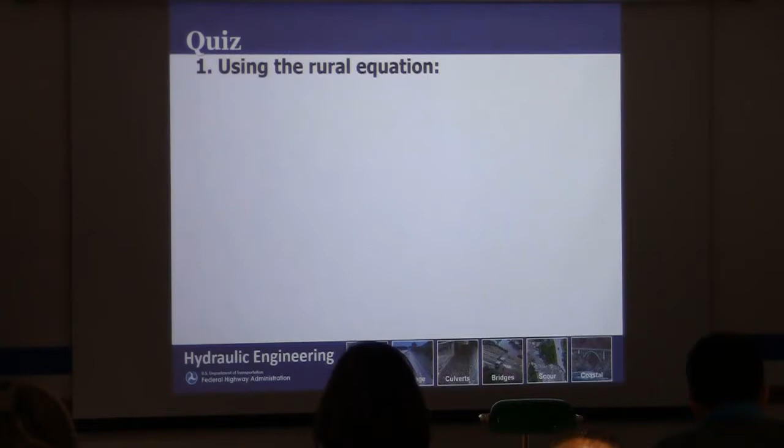Okay, why don't we go over the answers? So, using the rural equation, what does your Q25 equal? 1,800. Everybody get that, or about that?

Okay, great. How about the urban estimate? What did you get for the Q25 urban, with the BDF equals 0? 1740. Anybody else get anything? What'd you get? Okay, we got 1,700. It's probably just the calculator and the rounding off and stuff.

Okay, great. And so, oops, BDF of 4, I just gave it to you. What'd you get for a BDF of 4? So around 1,900, somewhere in there. And how about for a BDF of 8? 2,400. Well, isn't that funny? You got the BDF 8 right on, and you're a little high for the others.

Oh, well, yeah, but for Q25 you got 1,735. Anyway. Well, for the 1900 I got 1966. Yeah, I got 1967. But you came up with 2,400. Just odd. Close enough though.

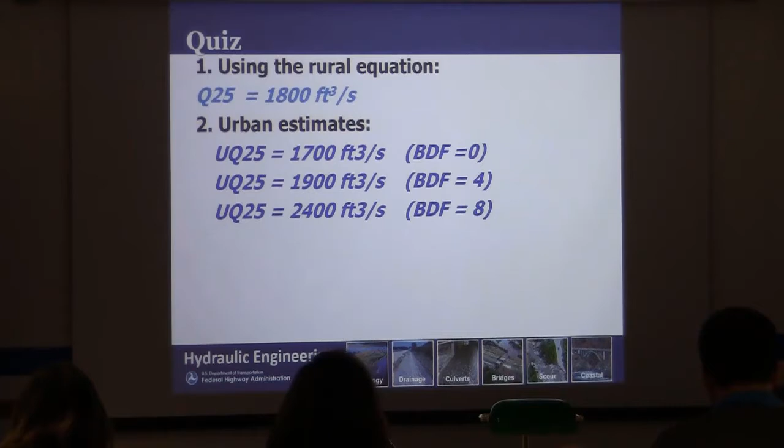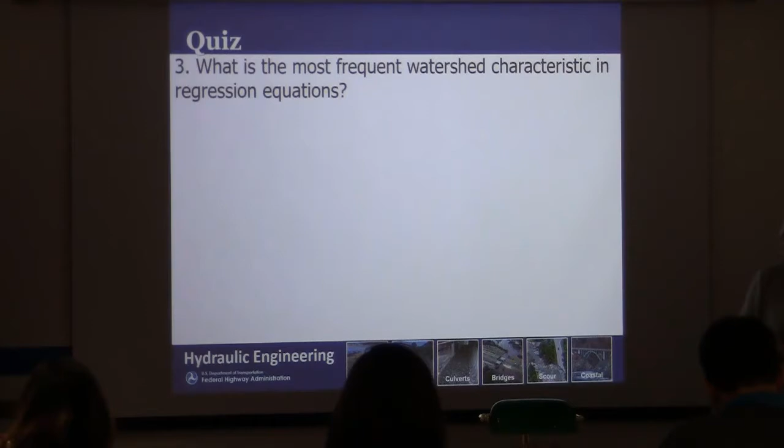Yeah, exactly. Okay. So question 3, what is the most frequent watershed characteristic in regression equations? Drainage area. Great. So, number 4, what's the standard error of the equation used in question 1? 41.3. And what does that suggest about the actual 25-year peak flow? There's an 84% chance it'll be 2,500 CFS or under. Yes, 84% chance.

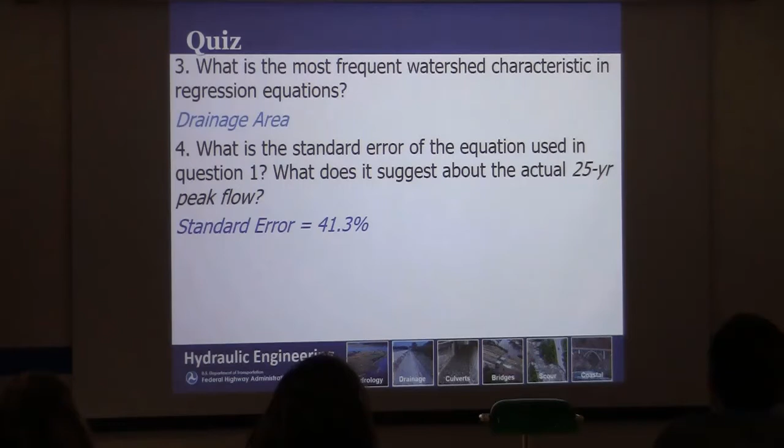But in more general terms, we're 68% sure that the actual value of the peak is within plus or minus 41.3% of the calculated value, and we are 84% sure the actual value of the peak is less than the calculated value plus 41.3%. So do you understand how we... that's funny, it's not showing.

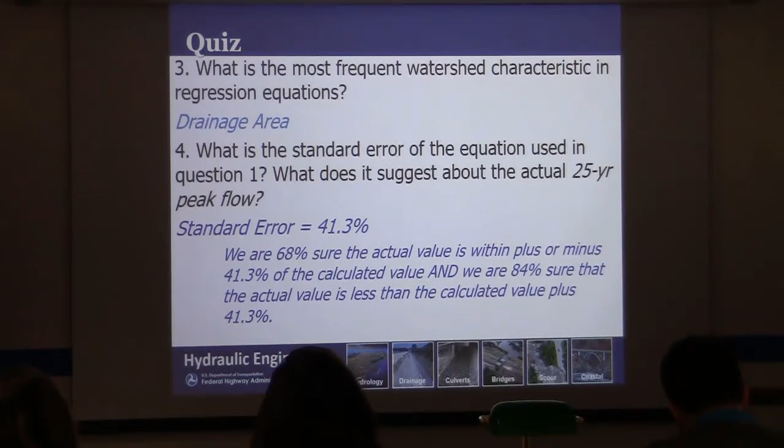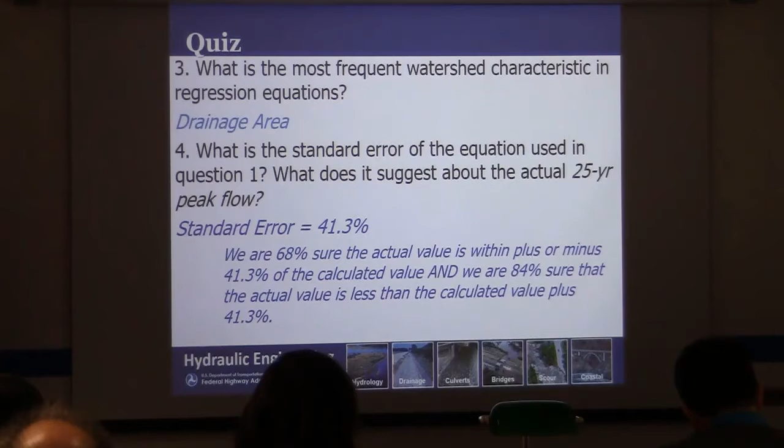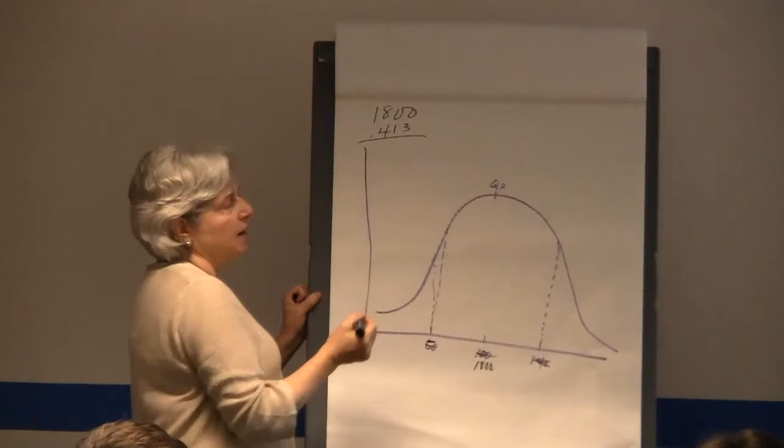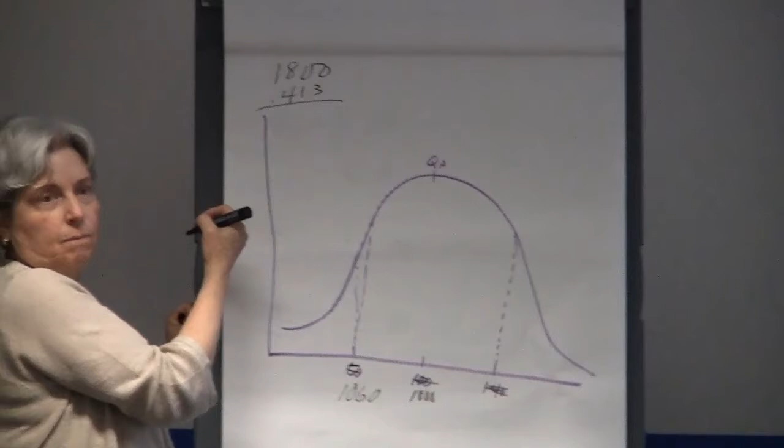So what we're actually saying is, if we calculate a peak of 1,800, minus 41.3%, we'd get the number. If you calculate this number, what do you get? About 1060. Yeah, what's the difference in these two? It must be, what, 740? Something like that. And this one is 2540, right?

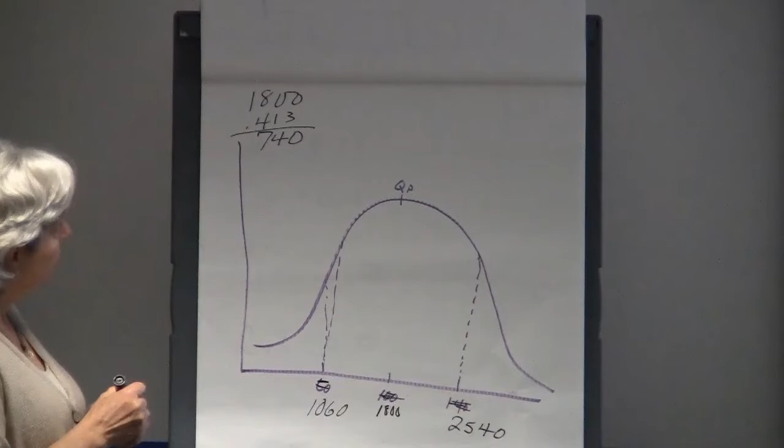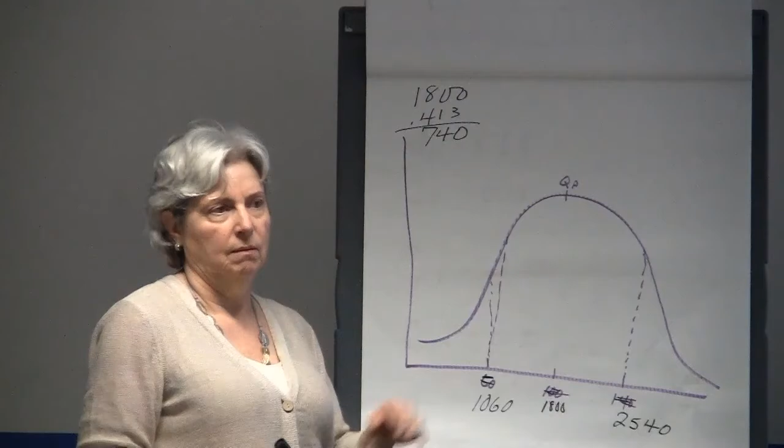So that's how you calculate your standard error and what the range is. Our 1,800 is our best calculation, but within one standard error the peak could actually be 2540, or it could be 1060, or anywhere in between. So we have a 68% chance that it's somewhere in this range, and an 84% chance that it is 2540 or less. Okay. And is that it?

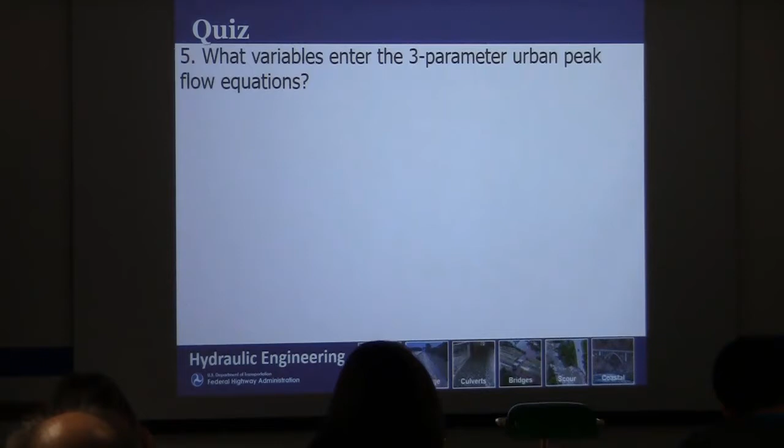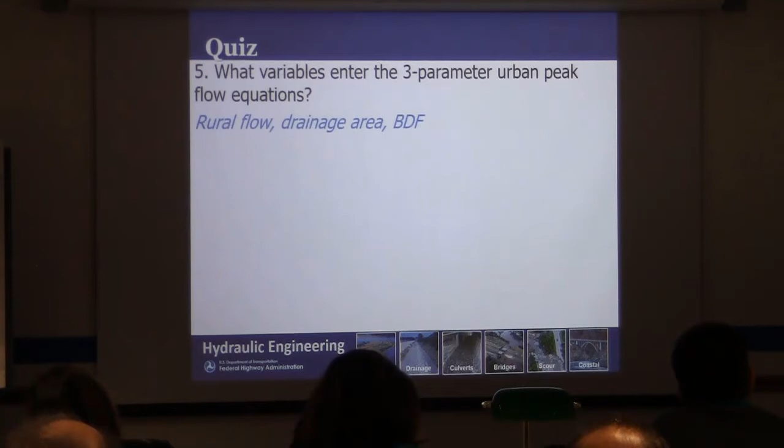So what variables enter the 3-parameter urban peak flow equation? Area, BDF. Rural flow, yeah. That's what you saw in the equation for the urban equation. Well, from the rural equation, depends on which equation you're using, but for this one, you're right.

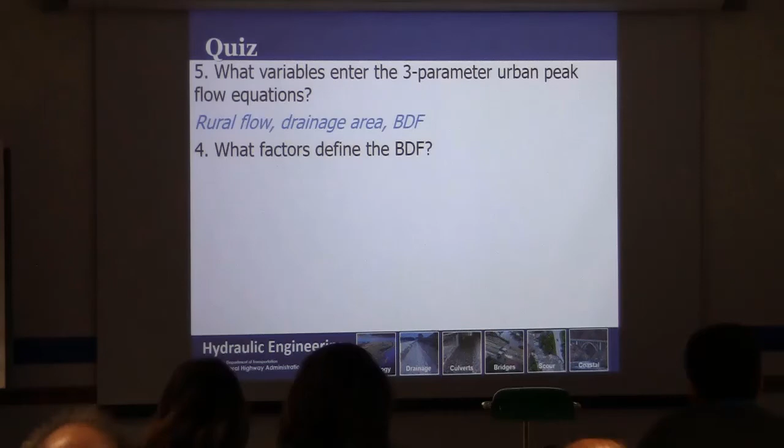Okay, what factors define the BDF? Channel modification, channel lining, storm drain coverage, urbanization, curb and gutter. Okay, everybody get that?

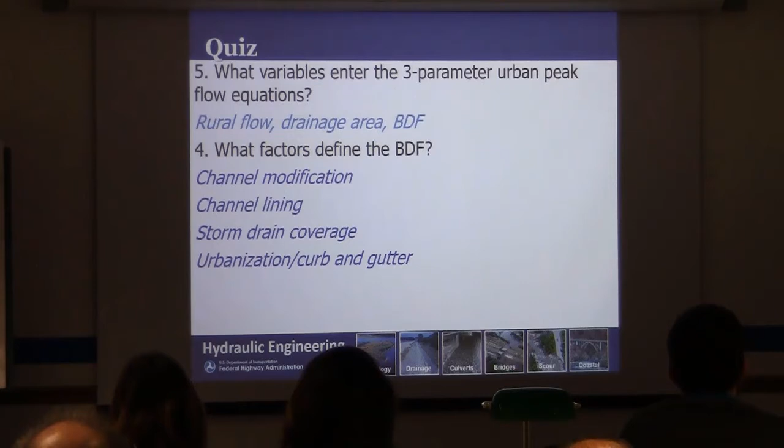Is BDF equal 0 indicative of a rural watershed? No, not always. So not necessarily. Why or why not? Because you can still have a 49% urban watershed, or just the way it's all laid out, you can have a bunch of urban land in the watershed, but still not over 50%. So it's still kind of rural.

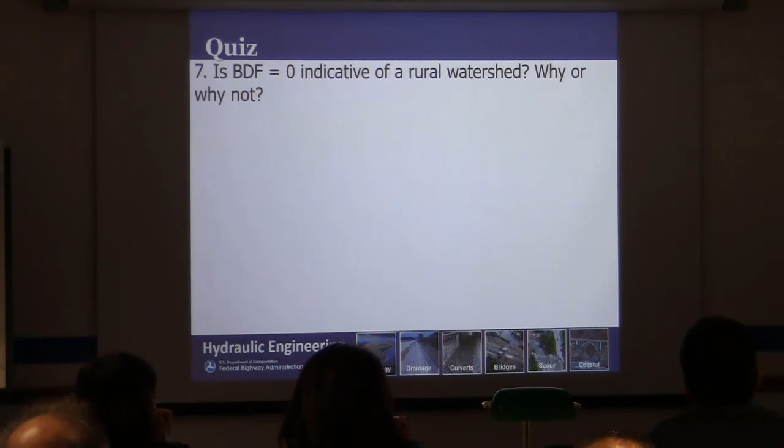Yeah, because it might be lightly urbanized and the BDF would be 0, but that's not always the case. Medium urbanized too, if it's up to 49%. Exactly. And it's also the way you divide that watershed into thirds. If you go a little one way or the other, you might have 50% on one of these things. Okay, that's it for this.